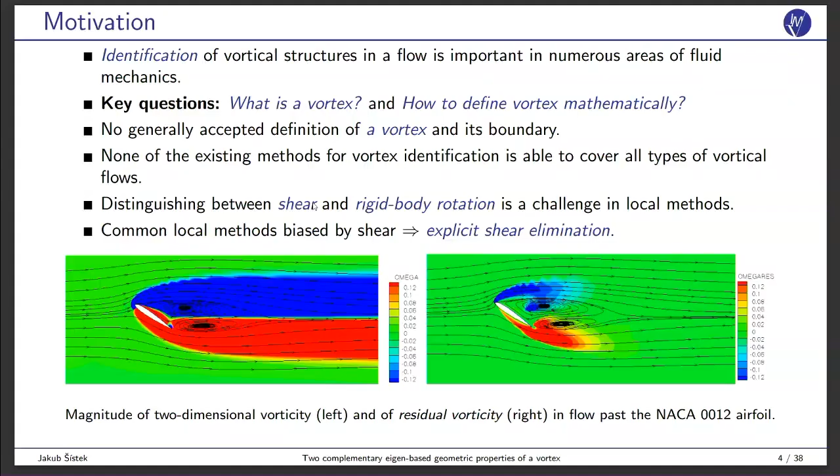You can do better if you split it into what Václav Kolář introduced as residual vorticity. You get closer to the vortices if you look at the stream traces, so you almost hit the center. I have to say that we have seen cases where you don't fit exactly the centers. So here I still believe stream traces have something to say, because I see some inherent limitations to these local methods. It's not only the center of the vortex that has a high value of the residual vorticity.

So some biased overview, I have to say, of local region type methods. I apologize to everyone working in the field having his method that I won't mention, but maybe the important questions.

Okay, now there's some feedback, I don't know.

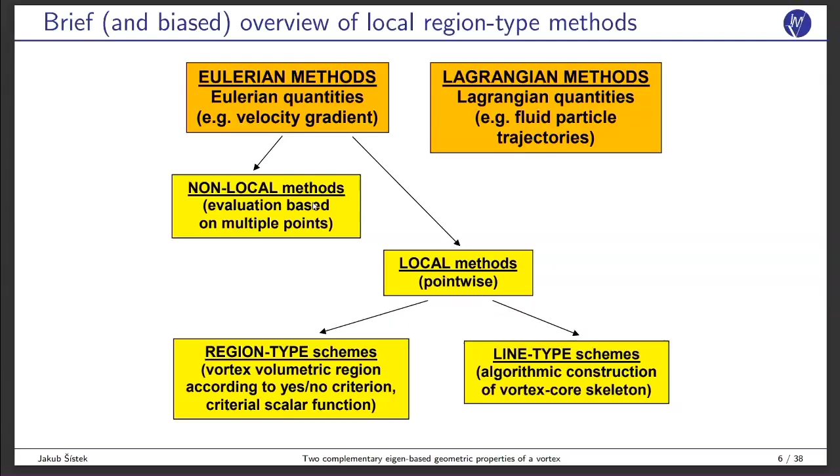Anyway, today I'll speak about Eulerian methods, and we are focusing on local methods based on the velocity gradient, pretty much. These split into region type schemes, and the rest of my talk will be about these schemes, whereas there are line type schemes that search for the vortex core skeleton, and my colleague Marek Pátý will speak about a method for this type of identification of vortices. As for the basics, we all know about the splitting of the velocity gradient into symmetric and antisymmetric parts, which are the strain rate tensor and the vorticity tensor.

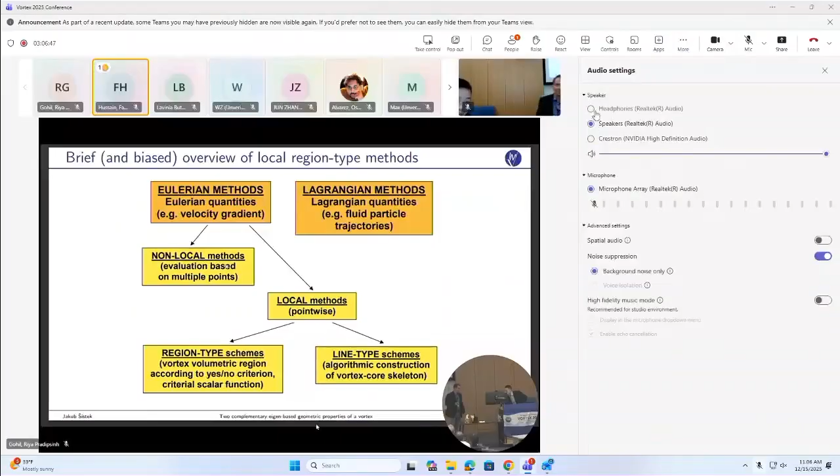Okay, can we do something about it? Ask more times. Is it better? Yeah, I think it's... Thank you. Is it solved? I close the speaker of this. Okay, I think it's better. Yes. Oh, okay. Yeah, because that's the speaker. Yeah. Okay.

Okay, this one. Perfect, thank you.

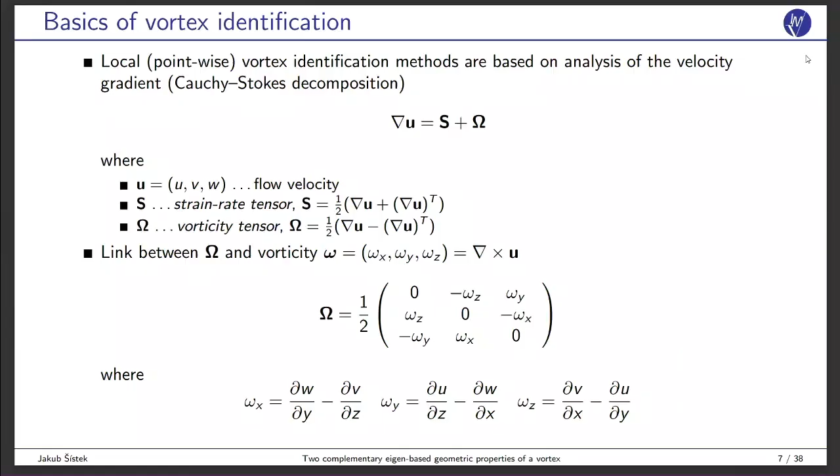I'll jump there quickly. So S is the strain rate tensor, obviously. Omega is the vorticity tensor. And there's a clear link between the vorticity tensor and vorticity vector, as we know. You can identify the vector and the tensor omega here.

I'll start my overview with the well-known Q criterion from 1988, saying let vortex be the region of fluid where we have positive second invariant of the velocity gradient. So it's this term. If you consider incompressible flows, then this trace here is zero, and it becomes this one, which then can be expressed in this way, which we like to read as the region where vorticity magnitude dominates over the strain rate magnitude, right?

So, but it's this equality that's valid only for incompressible flows, although I've seen people using Q criterion in this form even for compressible flows. I have to be honest here. Václav published some years ago a correction valid for compressible flows, and it's simply based on using the deviatoric part of the strain rate tensor here. So the deviatoric part, if you have compressibility effect, then this matrix has a non-zero trace, and you make it zero trace or deviatoric by subtracting the trace, as we know. So it's a slight modification using this deviatoric part here.

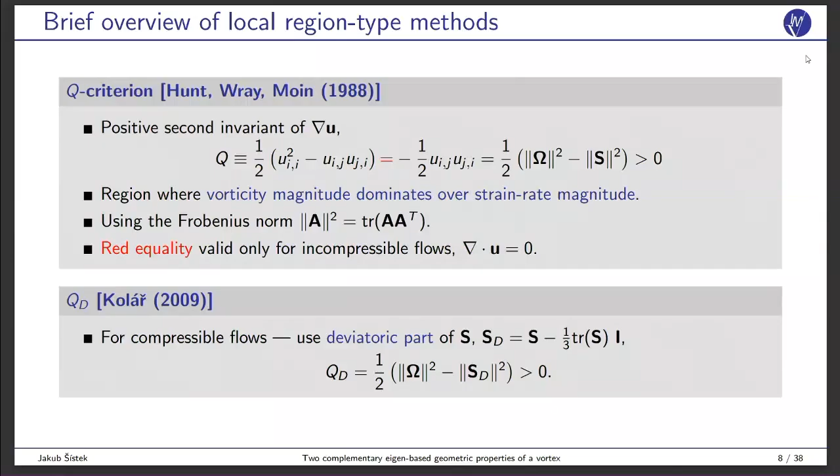Another well-known method is the lambda 2 method. I'm really honored to present lambda 2 in front of Professor Hussain, one of the authors of the method from 1995. It's based on a different idea. The idea is to get an approximation of the pressure Hessian using this S squared plus omega squared, these two matrices.

This is a symmetric matrix, so it has 3 real eigenvalues, and if you order them, and then you require, if there's a local minimum in a certain plane, you need to have 2 of them negative. That corresponds to the local minimum. So if they are ordered, it's the second one that matters. It's also derived from incompressible Navier-Stokes equations, although I've seen lambda 2 being used for compressible flows. The original paper on the identification of a vortex has been cited more than 8,500 times. So as far as I know, this is one of the most influential papers in the field of vortex identification.

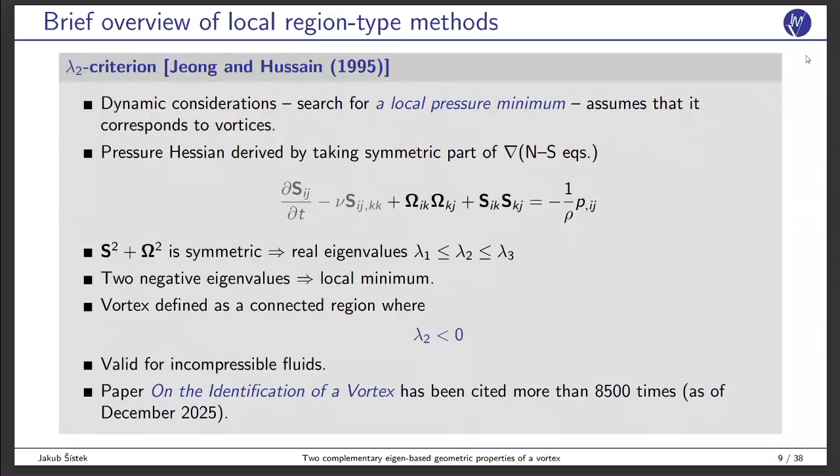Yet another idea how to define a vortex is this well-known analysis of the eigenvalues of the velocity gradient tensor. So this starts with the delta criterion, by different authors, and the idea is, we are speaking about a 3x3 matrix of real numbers, the velocity gradient. So there are only 2 options. Either it has 3 real eigenvalues, or there's a real eigenvalue and a complex conjugate pair of eigenvalues. So there are 2 cases. And this family of criteria says, let vortex be the region where we have this complex pair.

And the simplest criterion is the delta criterion, which stands for the discriminant of this cubic characteristic equation. And if it's positive, we have these complex eigenvalues, and we call this region the complex domain. And I will use the term later. A refinement of this criterion is the swirling strength, another well-known criterion which looks at the magnitude of the imaginary part of this complex eigenvalue and says this has a meaning of angular velocity, and the larger the imaginary part, the stronger the swirling. So that's why swirling strength. It has obviously the same zero isocontour. So if you see it as a criterion, then it corresponds to the delta criterion.

It has a drawback though: there's no analytical formula to define the basic reference frame where the effect of shear is maximized. So the definition in 3D is complicated. It defines the coordinate system where to perform this splitting using an optimization problem in each point, and that makes the method quite time consuming.

So at the moment, because it's an independent and pointwise method, we are using a lot of GPU computing to compute this method. But we are still speaking about several minutes to evaluate a reasonably sized flow field with this method.

So obviously we have tried to make the method cheaper, and the way to look at it was to look at the two-dimensional problem, or the triple decomposition in a plane, and there's the concept of corotation of line segments. So if you look at the line segments at a point, if they all rotate, there is the lowest angular velocity and the highest angular velocity.

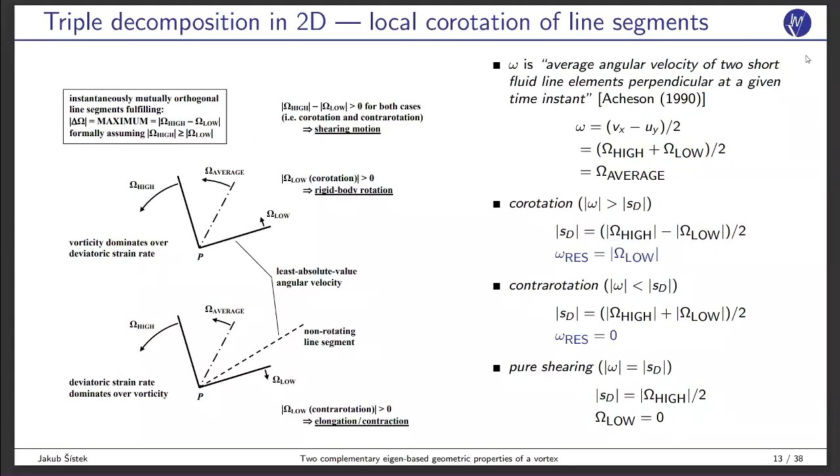By the way, the usual vorticity is the average angular velocity. If they all corotate, then the residual vorticity is non-zero, and it corresponds to the lowest angular velocity. If there is some opposite rotation, the contra-rotation case, then the residual vorticity is 0. So these are the formulas. In 2D, we have simple formulas that are immediate to evaluate.

So if it's simple to do it in a plane, we were trying to come up with a vector that would correspond to a plane. The problem here is which plane to take. So we are trying to cut the three-dimensional flow field by a plane and evaluate the 2D residual vorticity. At the beginning, we tried some experiments with maximizing this value, but it didn't lead to a very robust method.

In this plane, given by the normal of the plane, we evaluate the 2D residual vorticity and define a 3D vector from that. And then a more successful approach, an approach I really like a lot now, is to average this vector over all the possible planes cutting through the point. For that, we reformulate the problem of all the planes as all the tangential planes of a unit sphere and take its normal. And in fact, the averaging becomes a problem of integrating a surface integral on a sphere.

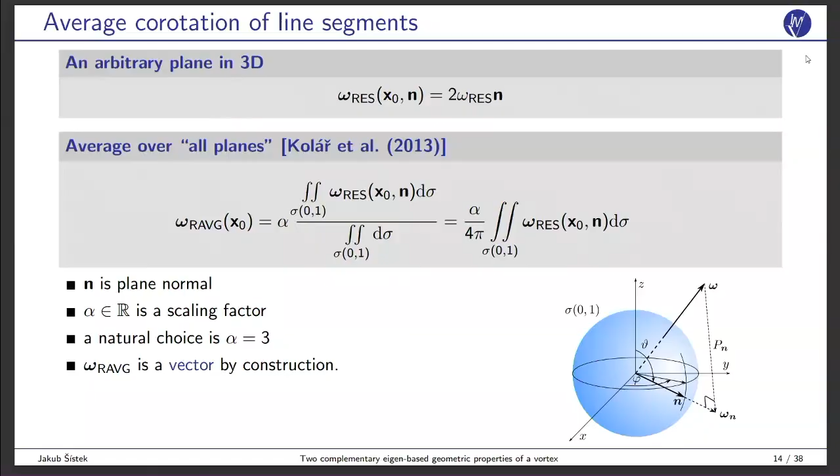The unit sphere is scaled properly so that you reproduce the vector. It works like projections of an unknown vector into the different normal directions. And this is again a vector by construction that we call average corotation of line segments. We've been using this method a lot since our paper on the topic in 2013. Yes, it's way cheaper than the residual vorticity formulated in this optimization problem.

The last method in my overview is the Liutex method that we've heard a lot about in the morning, developed by Professor Liu here at Arlington. This is the formula for Liutex that we've also seen. I think the nice idea about Liutex is that it gives the direction of the real eigenvector of the velocity gradient, in the case we have the complex conjugate pair, so it only works in the complex domain. It's extended by zero naturally elsewhere.

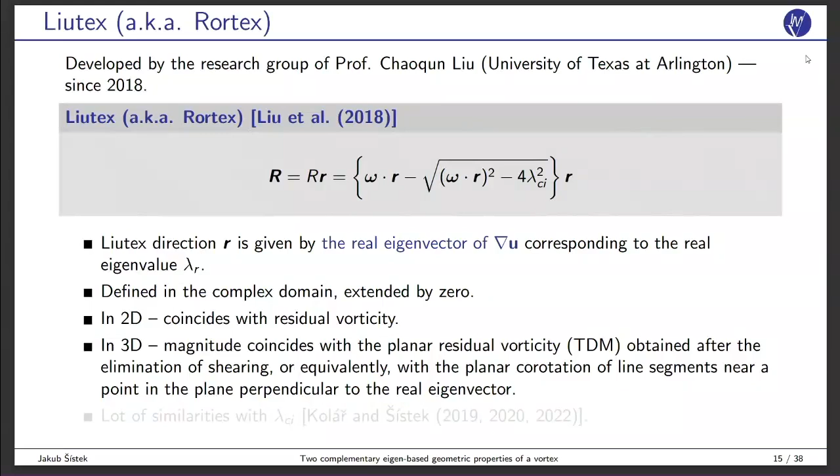Interestingly, in 2D it coincides with residual vorticity. So this method kind of also solves the problem of which plane to evaluate the residual vorticity in. It takes the plane perpendicular to the real eigenvector. In 3D, it takes that plane, and the magnitude coincides with the residual vorticity in the plane. So it's really 2D residual vorticity magnitude with the direction of the real eigenvector.

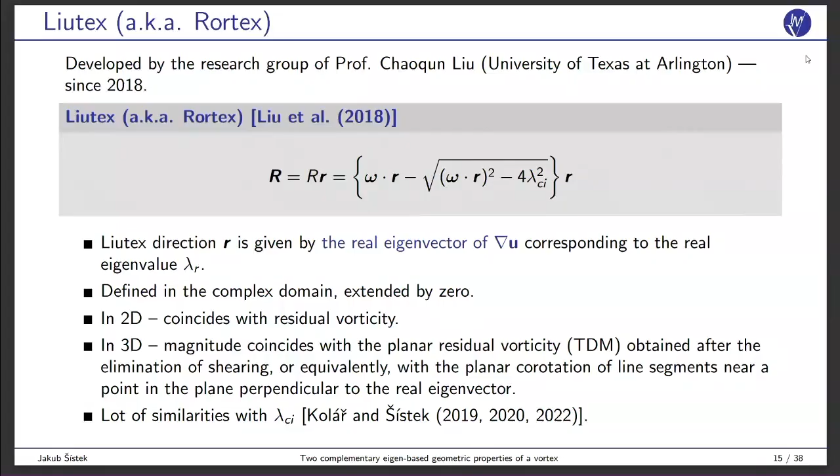And it has a lot of similarities with the swirling strength criterion. We have studied this a little bit in these papers, also looking at some of the weaknesses inherited from the swirling strength criterion, which are studied in literature and quite well known. So now to the new results. The first is on orbitally compact and loose vortex regions.

In this paper, we start from the eigendecomposition of the velocity gradient. So again, we will be limited to the complex domain. This is the matrix of unit eigenvectors and the eigenvalues. The eigenvalues are used to define what we call an orbital compactness sigma, and the matrix of eigenvectors is used to define the cylindricity tau, and it was published in this paper recently.

So the idea of compactness is not new. It has been introduced for incompressible flows, and it requires that the separation of swirling material points inside the vortex is bounded and remains small.

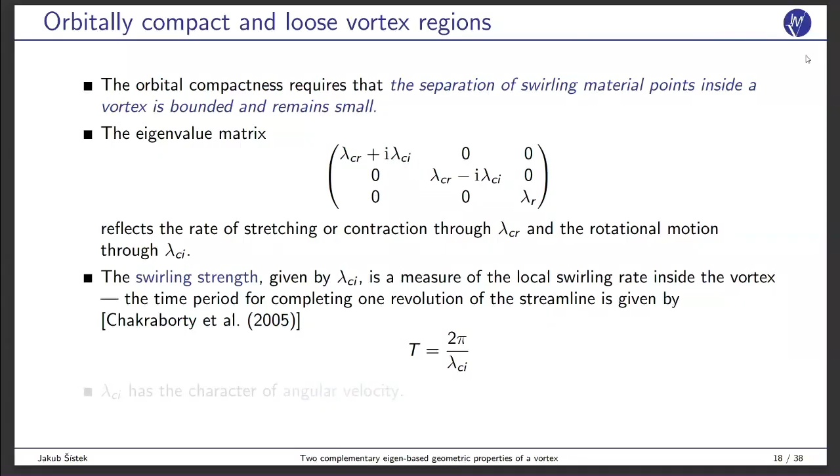So the rate, yes, the stretching changes the real part of the complex eigenvalue, and rotation changes the imaginary part of the complex eigenvalue. And I should also mention that the meaning of the swirling strength is the angular velocity, because the period of, if you look locally at the swirling streamline, you can approximate it as, in this important paper that has inspired us a lot from 2005, you can view it as angular velocity here.

And it was this paper where they studied the effect of stretching. And for incompressible flows, this stretching in radial direction, which is translated into this lambda CR, the real part of the complex eigenvalue, or axial stretching, which is the real eigenvalue, they are connected through this incompressibility condition, zero trace. They are connected together.

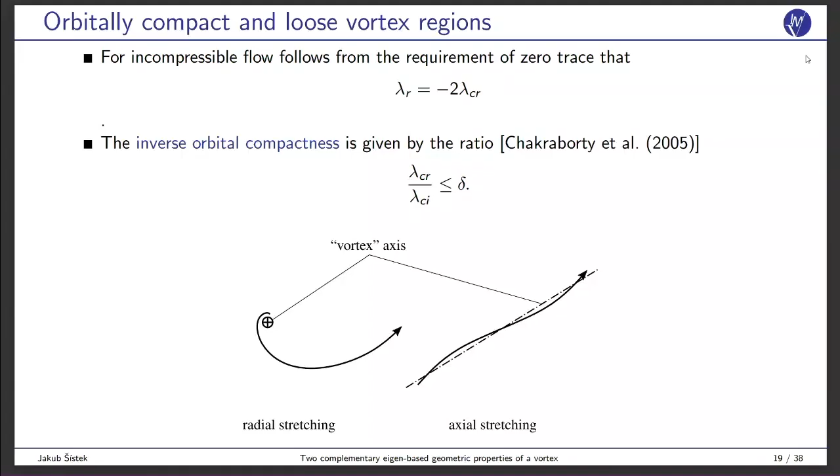They need to fulfill this condition. And the inverse orbital compactness introduced in this paper, the authors proposed to limit this important factor, this real part of the complex eigenvalue over the imaginary part of the complex eigenvalue, by certain threshold delta, so that you don't allow a very large stretching in your vortex. I think I'll go quickly here.

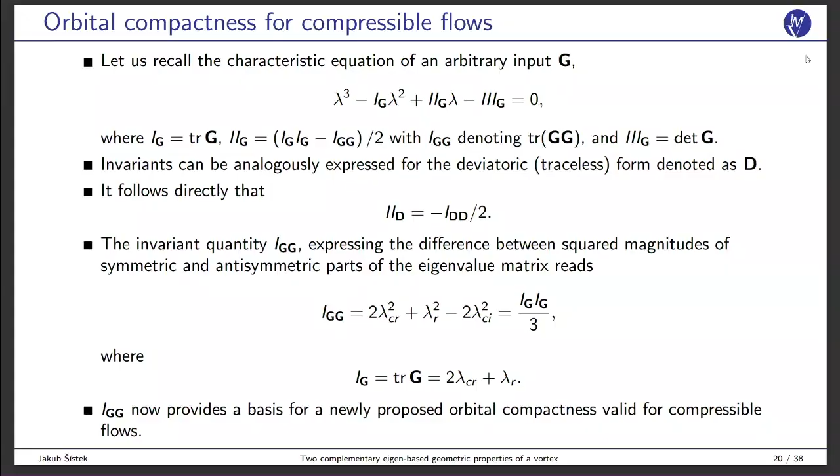If you look at its trace, you can formulate it using this trace of g, which is squared. And this squaring is a problem here, and although this provides the basis for the new compactness that would be valid for compressible flows, it's not sufficient. So some other considerations are as follows.

So for compressible flows, this condition doesn't hold, but you want to take into effect, say, pure volumetric deformation like contraction, compression, or expansion. Expansion has a positive trace, compression a negative trace, and in this pure case they would coincide. So all the real parts would be the same. If it's a geometric property, you don't want it to be proportional to lambda ci, because the compactness should be valid both for strong and weak vortices.

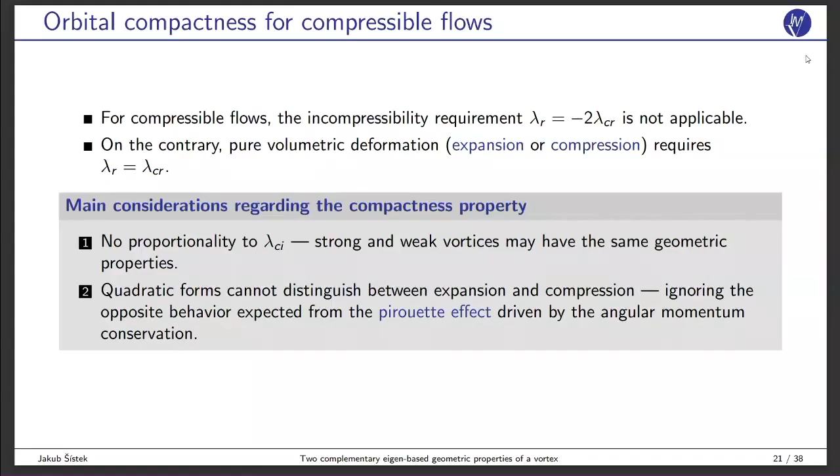And the key idea here was that this quadratic form, this trace squared, cannot really distinguish between expansion and compression. So it ignores the effect, whereas the intuitive way would be that compression helps the compactness, whereas expansion weakens it. So that's kind of why we considered this thing. So this is the final form of the compactness, orbital compactness sigma, which has a deviatoric part here based on the eigenvalues. I won't comment on it that much.

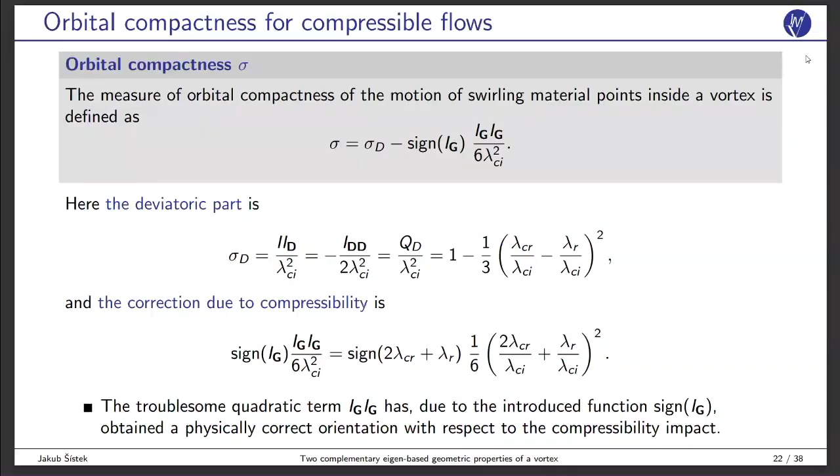And then this correction due to this compressibility effect takes into account that the compression makes the compactness stronger, whereas expansion weakens it. So that's pretty much the meaning of this correction term here. I like this plot that we've presented.

It's a plot given the axis of real eigenvalue over the imaginary part of the complex eigenvalue, and real part of the complex eigenvalue over the imaginary part of the complex eigenvalue. In this plot, this blue line corresponds to incompressible flow due to this condition lambda r equals -2 lambda cr. Over here is the expanding part, down the blue line is compression.

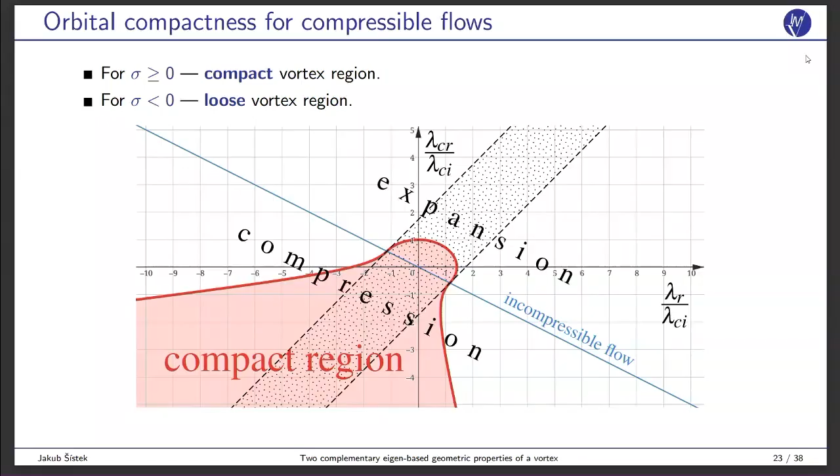So if you don't consider the correction due to compression, you would end up having this dotted band as compact vortices. If you consider also the compression part, the trace, in the expansion region you make it smaller, whereas the area of compact vortices expands in the compression region.

These are 4 flow cases that we've tested the method on. This is flow around a sphere, around a plate, then one vortex from the boundary layer transition, and a reconnection process of 2 Burgers vortices. And on these 4 cases, we've evaluated 5 vortex identification methods, and we looked at what part of the identified vortex corresponds to compact region and what corresponds to loose region.

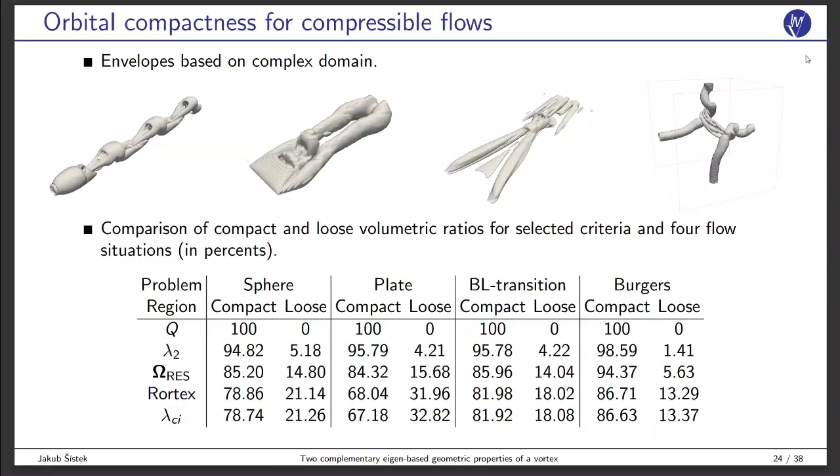So Q is compact by definition. It's a very strict criterion, 100% in compact zone. Lambda 2, large part compact, some loose. The residual vorticity is showing a lot of compact, but also a lot of loose region. Rortex and lambda CI can show a large part of the vortex as loose region, in fact, evaluated using this compactness. And if we speak about loose, it can be really loose.

I have an example of a logarithmic spiral here with a growth corresponding to this ratio of lambda CR over lambda CI. And we define the compact vortices as those with sigma larger than 0. So even if this ratio is 12 times higher, we still call it compact. So even if it almost doesn't revolve, it's still called compact.

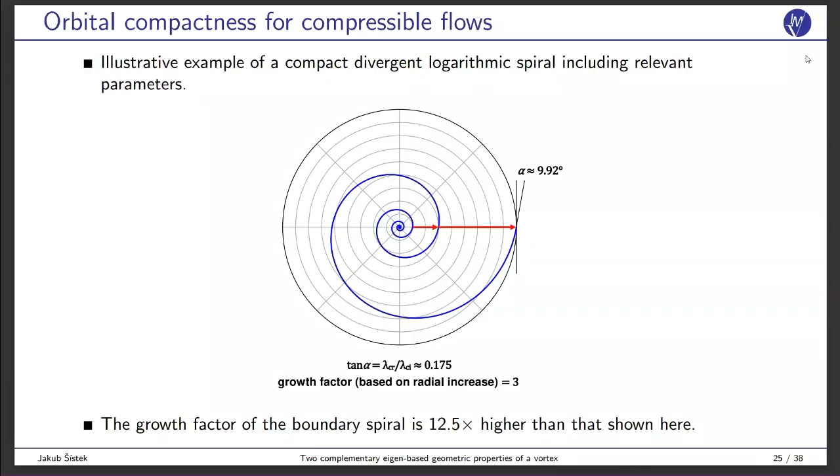So it's interesting to see how fast the stretching can be to still call the vortex compact. In my last time, I will briefly mention the concept of cylindricity of a vortex.

They started with an interesting observation from a paper by Chong and others from 1990, which states that a vortex core is a region of space where the vorticity is sufficiently strong to cause the rate of strain tensor to be dominated by the rotation tensor. That is, the rate of deformation tensor has complex eigenvalues.

So if you read carefully, this sounds like the Q criterion, whereas this is the delta criterion, and it sounds like the Q criterion is a necessary condition to have complex eigenvalues for the delta criterion. And actually this is not true. In this paper we formulated counterexamples and what sort of mechanism is behind them.

We've considered this form of tensor of velocity gradient. This is the same as here. If it's minus, it will be 2 times plus 2 times that here, and then omega here. And even in the case of very large strain rate here, and very small but non-zero omega, you can evaluate the delta criterion, the discriminant of the cubic equation, to see that it's positive and you will have complex eigenvalues.

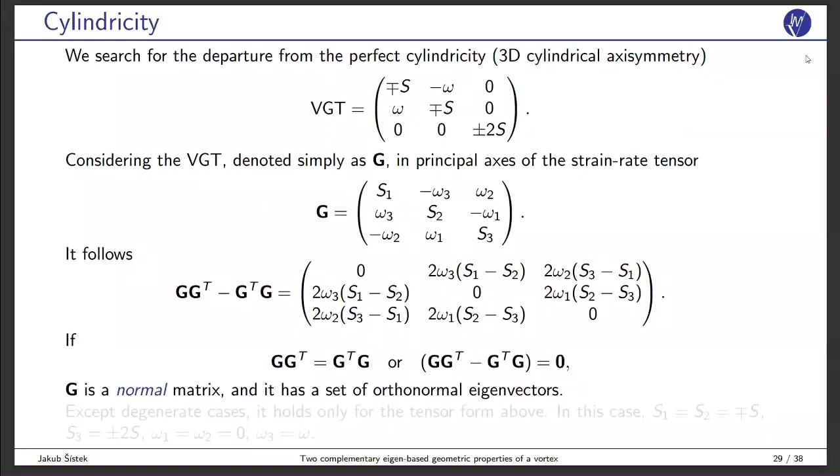So it's actually the angles between the unit eigenvectors that are important for the cylindricity. So if you have a cylindric velocity gradient, you may have very low vorticity and still qualify for the complex domain. That's the takeaway message, so to say.

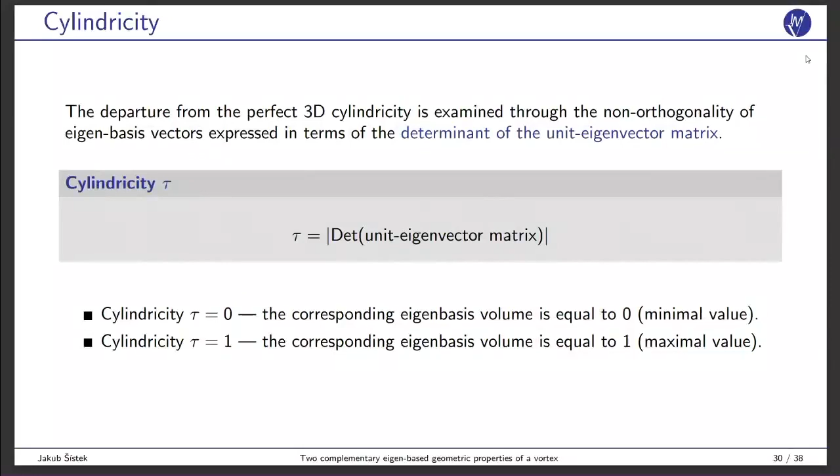So we've proposed the measure of cylindricity, taking the matrix of unit eigenvectors, computing its determinant, and taking its absolute value. It can range from 0, which is no cylindricity, to 1, which corresponds to an orthogonal eigenbasis and perfect cylindricity. To summarize these two concepts, we have this eigendecomposition, and from eigenvalues we take the orbital compactness, from eigenvectors the cylindricity and 2D axisymmetry. Both are defined only for the complex domain, naturally, and compressibility only affects the compactness.

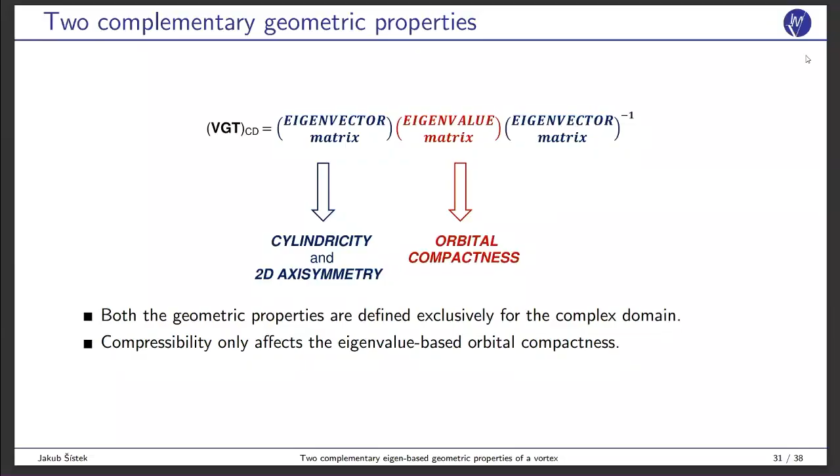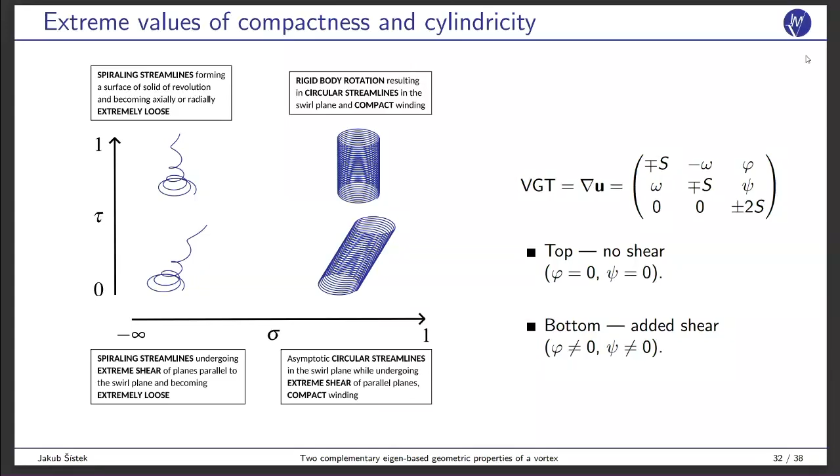They are mutually independent. You can have cases where you have compact vortices and high or small cylindricity, so the top row is with 0, the bottom row with non-zeros. So here you have loose vortices. That's like an approximation of the streamline at the point. This would be loose but cylindric, and this would be loose and with low cylindricity.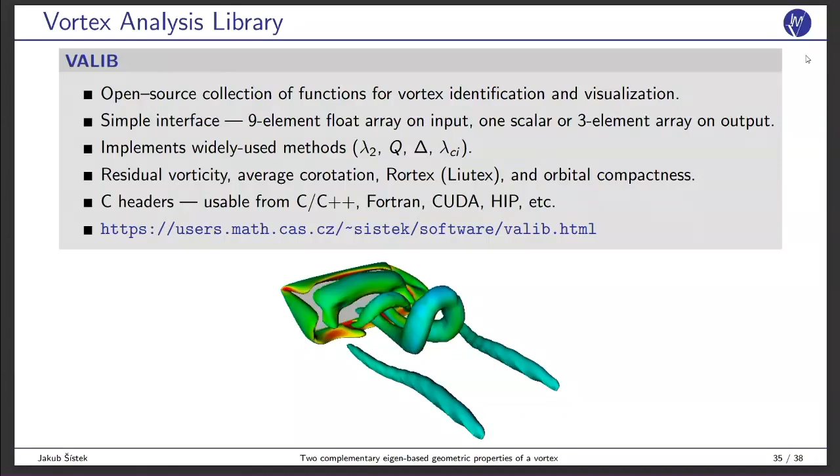We've implemented these into a collection of routines for computing these vortex identification criteria that we called VALIB, Vortex Analysis Library. It's C headers, so they are usable from C and C++. We have Fortran bindings, and we use them a lot for GPUs from CUDA and HIP.

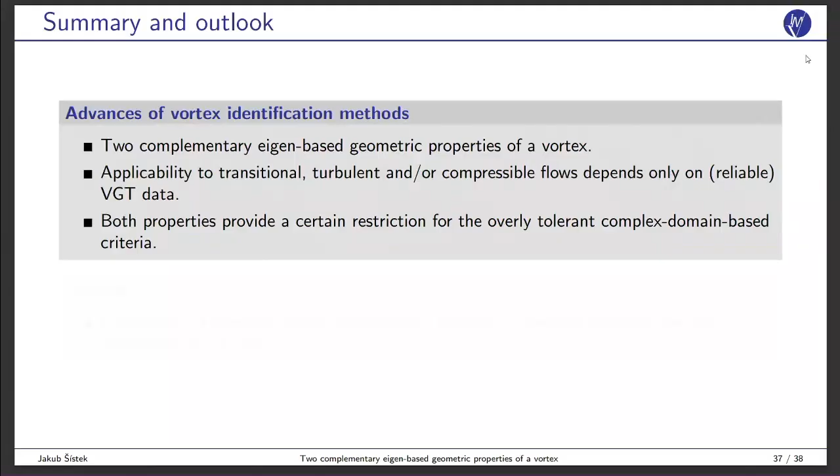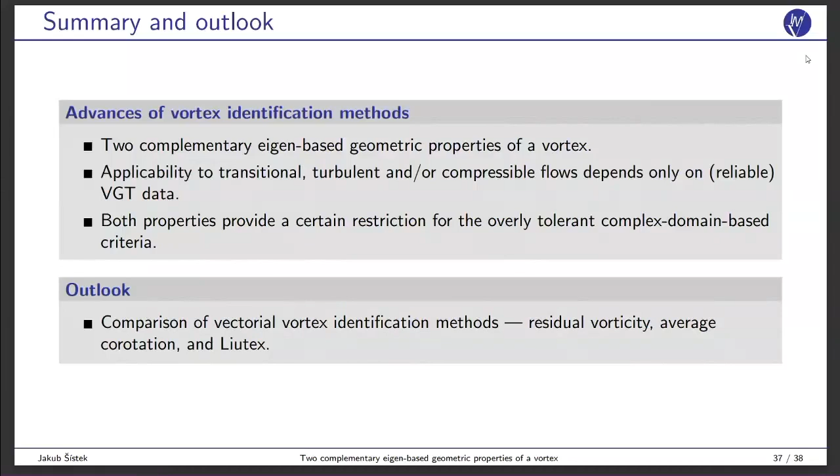To summarize, I've presented 2 complementary eigen-based geometric properties of a vortex. They are applicable to a range of flows, even compressible, and they can provide some restriction to the overly tolerant complex-domain-based criteria. As for the outlook, I think it would be interesting to make a proper comparison of the vectorial vortex identification methods like residual vorticity, average corotation, and Liutex.